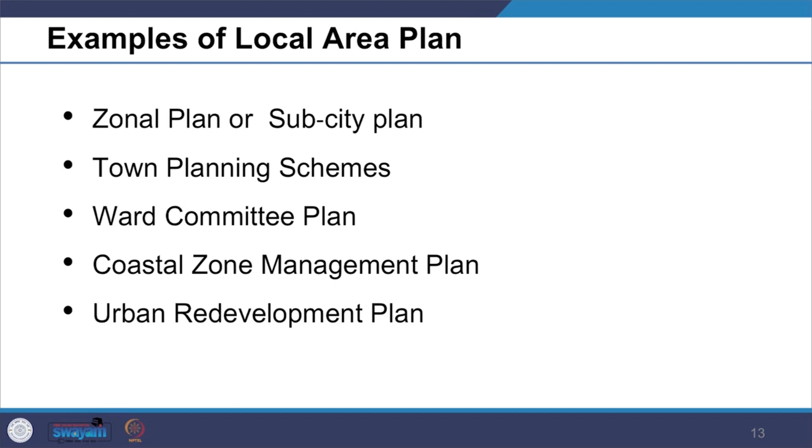Examples of local area plan include zonal plan or sub-city plan, town planning schemes, ward committee plan, coastal zone management plan, urban development plan, and urban redevelopment plan.

Once the development plan is prepared, its proposals can be further implemented by preparing a local area plan. Local area plan is significant in view of the 73rd and 74th Constitutional Amendment Act, as a local area plan, in its true sense, allows disaggregation of the planning decision and implementation process. Local area plan improves the implementation of the development plan, and most importantly, it brings the planning process closer to the local people. It allows the realization of the development in our neighborhoods.

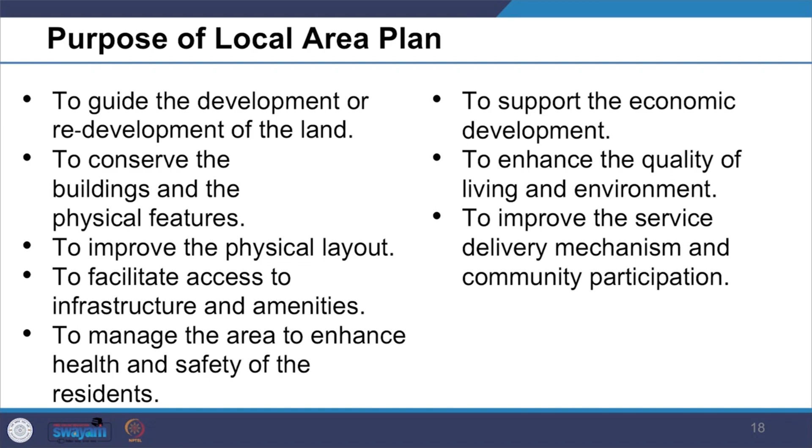Local area plans are primarily prepared to guide the development or redevelopment of the land, to conserve the buildings and physical features, to improve the physical layout, to facilitate access to infrastructure and amenities, to manage the area to enhance health and safety of the residents, to support economic development, and to enhance the quality of living and the environment. Local area plan is used for improving the service delivery mechanism and community participation.

While preparing the local area plan, it is also important that implementation details are specified and aligned with government policies, such as the state land use policy, state perspective plan and/or state urbanization policy, state urban housing or affordable housing policy, township and integrated township policy, rainwater harvesting policy, energy policy, disaster management policy, industrial and service sector investment policy, policy for a barrier-free environment for the elderly and physically disabled, e-governance and information technology policy, tourism policy, and similar other policies.

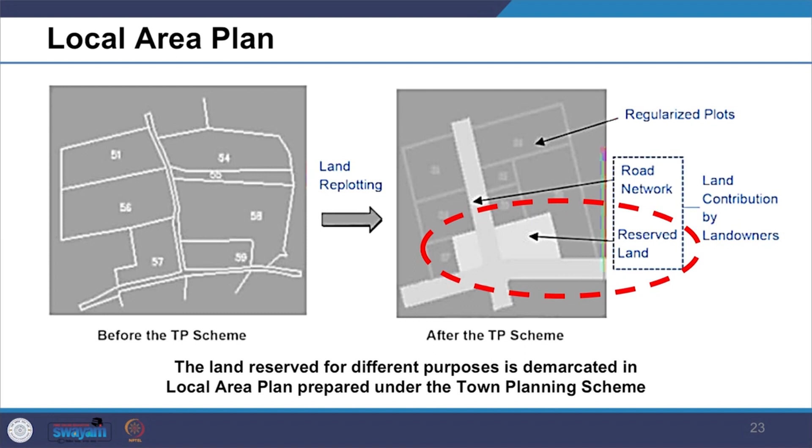In the local area plan, specific projects within the planning area should be prepared. The land reserved for different purposes such as roads, public purpose, construction, or reclamation should be delineated.

The local area plan provides a framework for recovery of the associated cost for the proposed public projects. The mechanism adopted could be levy of betterment charges, charges on additional development rights, or user charges.

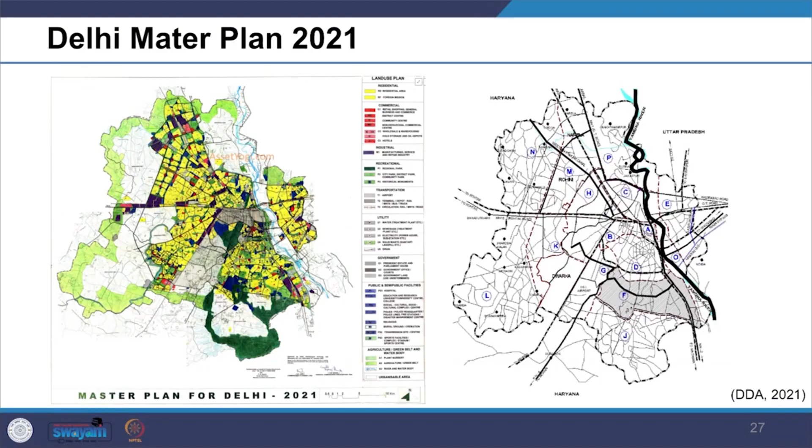Now let us look at the example of Delhi. We are looking at the Master Plan of Delhi 2021, where planners had prepared the master plan for the entire city. In order to prepare the detailed sub-city land use plan, the Delhi planning area is further subdivided into 15 planning zones, or divisions, designated alphabets A to P, excluding I, as per the Master Plan of 2021, as we can see in the image.

These zonal plans integrate the area with the urban infrastructure, mobility and services. These zonal plans help in implementing the development plan of Delhi by guiding the detailed development in these zones.

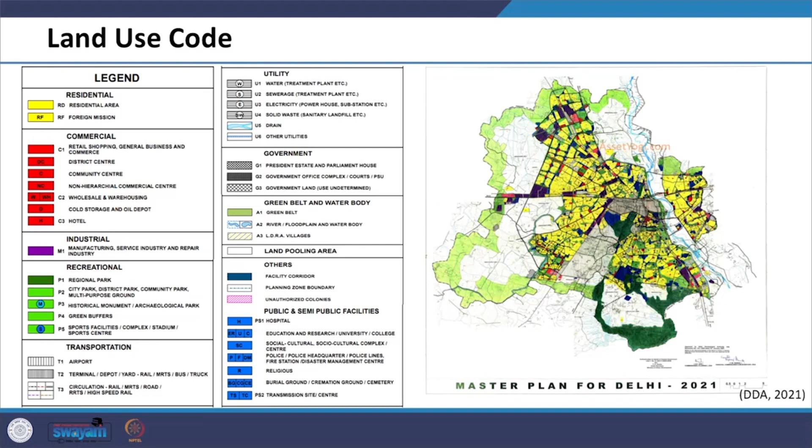A zonal development plan means a plan for each zone or division, containing information such as provision of social infrastructure, parks and open spaces, and circulation system. The zonal development plan indicates the actual as well as proposed use zones designated in the nine land use categories stated in the master plan, according to which the area in the zone is to be finally developed.

We will look in detail at the zonal plan F of Delhi to understand the intent and content of a zonal plan document. Zonal plan F covers the South Delhi 1 area.

The hierarchy of urban development indicated in the zonal development plan is in conformity with the master plan 2021.

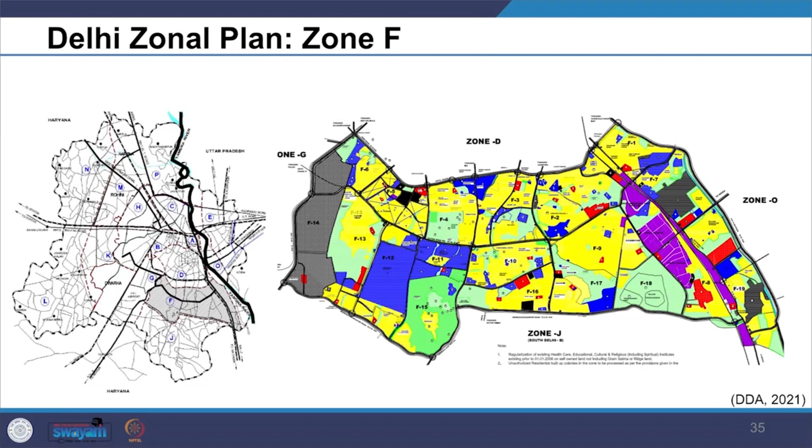Zone F, covering an area of nearly 11,958 hectares, is situated towards the south of Ring Road from Dhaula Kuan to Maharani Bagh. In the east, it is bounded by River Yamuna and National Highway 2 bypass. In the west, it is bounded by Delhi Cantonment Area, Indira Gandhi International Airport, and National Highway 8. In the south, it is bounded by Badarpur, Mehrauli, Mahipalpur Road.

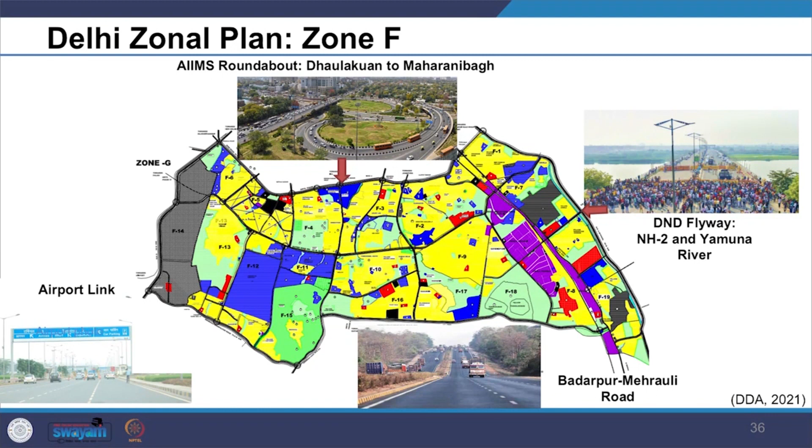The zonal plan should contain an introduction section which should provide a brief about the city, indicating its regional setting, functional character, and growth trends.

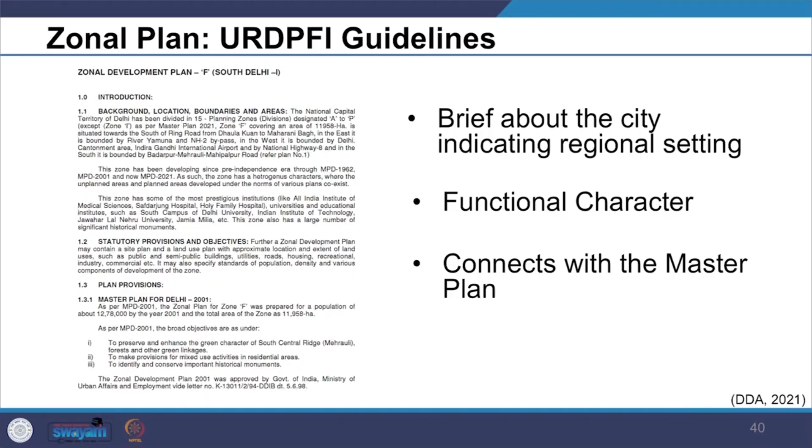Further, the introduction section should also refer and connect to the development plan or the master plan of the city, for which it acts as a building block. We call it a building block because the local area plan plays an important role in the realization of the development plan or master plan of any city.

In the plan, we also inform about the built up area, character, extent, and the delineation boundaries, so as to understand the area and plan for the interventions.

In this introductory section, the interdependence of the planned zone with the other zones should be specified so that in the plan we understand the vital role of the zone in facilitating the development of the area under consideration, as well as its key role in contributing to the smooth functioning of the entire city, particularly mobility and services.

If we look into the zone, this zone has been developing since the pre-independence era through master plans of 1962, 2001, and 2021. As such, the zone has heterogeneous character, where the unplanned areas and the planned areas developed under the norms of various plans coexist.

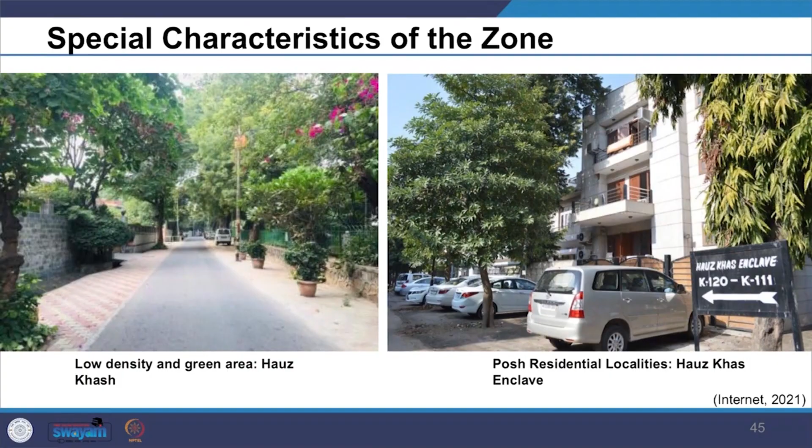Zone F is identifiable with low density and green character. This zone is mainly comprised of planned, well-maintained, posh residential localities. This also includes rehabilitation colonies and government housing areas.

This zone has some of the most prestigious institutions like All India Institute of Medical Science, Safdarjung Hospital, Holy Family Hospital, universities and educational institutions such as South Campus of Delhi University, Indian Institute of Technology, Jawaharlal Nehru University, and Jamia Millia University.

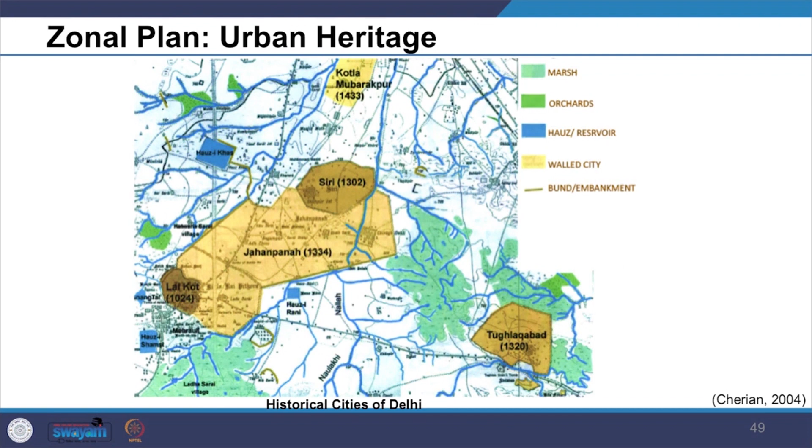A significant feature of this zone is its urban heritage, where the first four cities of Delhi, namely Lalkot, Siri, Tughlaqabad, and Jahanpanah, are located.

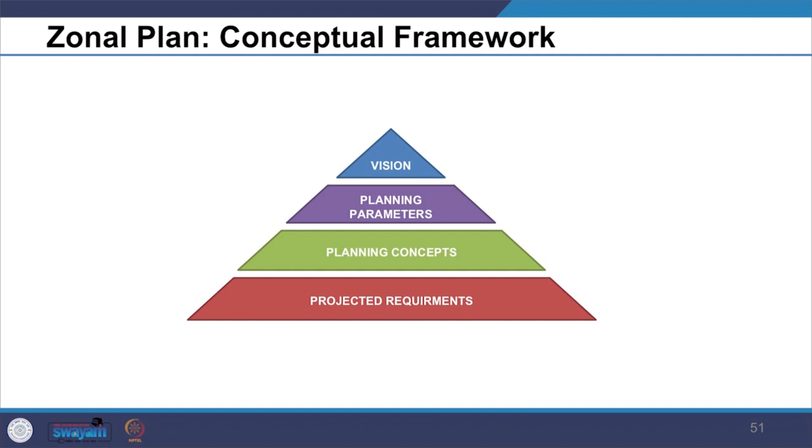The next content suggested in the guidelines includes the site background and analysis, followed by conceptual framework covering future vision, planning parameters, planning concepts, urban design framework, and projected requirements and hierarchy targeted in the zone.

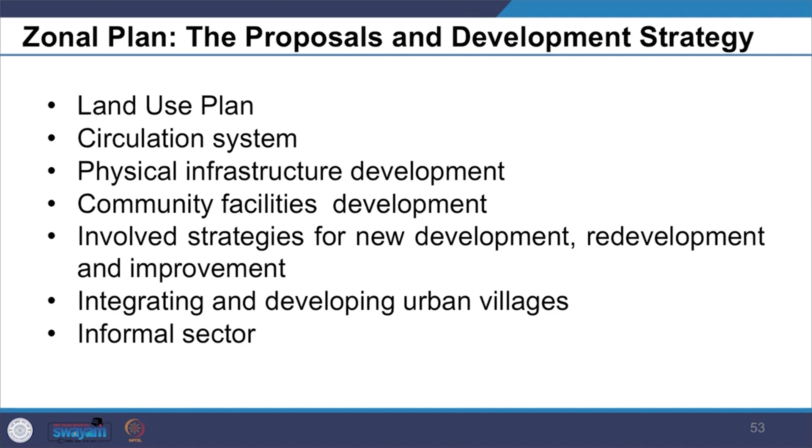Thereafter, in the zonal plan, the proposal and development strategy should be provided with details, including the land use plan, proposed circulation system, proposals for physical infrastructure development, and proposals for community facilities development, along with strategies for new development, redevelopment, and improvement. All these plans have to be given.

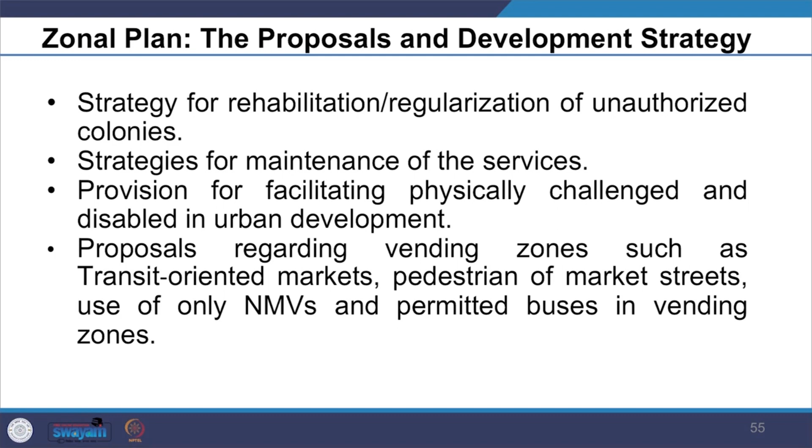A proposal for integrating and developing urban villages has to be provided, as well as a proposal for informal sector development. The details should also cover the strategy for rehabilitation and regularization of unauthorized colonies, strategies for maintenance of services, and provision for facilitating physically challenged and disabled persons in urban development.

Proposals regarding vending zones, such as transit oriented markets, pedestrianization of market streets, use of only non-motorized vehicles and permitted buses in vending zones—such kinds of interventions can also be taken up in the zonal plan.

Further, in order to address the concerns of the environment, the guidelines suggest the following should be covered. A plan for conservation and improvement of land profile, rivers, streams, watersheds, green covers, and landscape should be prepared as per the requirements of the zone. Identification of the heritage areas and zones, and a plan for their conservation, should be provided.

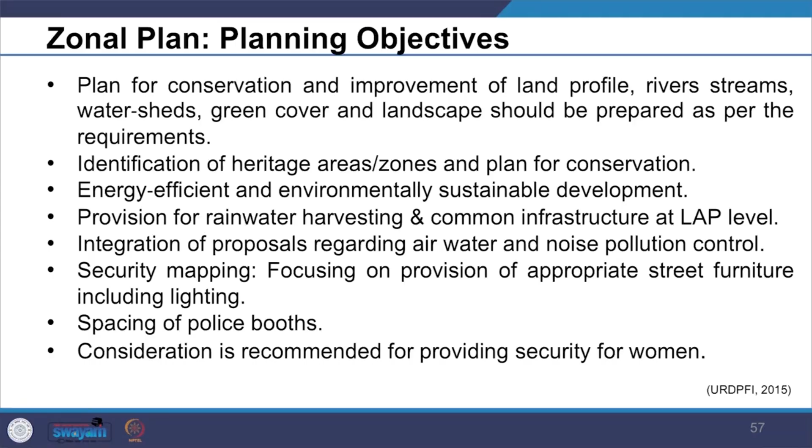Energy efficient and environmentally sustainable development has to be taken care of. Provision for rainwater harvesting and common infrastructure at local area plan level has to be considered. Integration of proposals regarding air, water and noise pollution control has to be done. Security mapping focusing on provision of appropriate street furniture including lighting needs to be undertaken, and spacing of police booths has to be done. Also, consideration is recommended by the guidelines for providing security for women. So all these things have to be taken care of as environmental concerns while working on the zonal plan.

Furthermore, zoning regulations have to be seen, such as defining various zones, what use restrictions would be there, uses permitted, conditionally permitted and uses which are prohibited has to be spelled out. What has been proposed for mixed use land uses has to be indicated. Strategy for non-conforming land use has to be mentioned, and strategies for hazard zones and regulations have to be clarified.

Proposal for meeting women's needs, further mixed use development with focus on street activities, is also recommended specifically for women's needs. Transit oriented development and space provision for street vendors have to be encouraged in areas to be active at various times of the day and night.

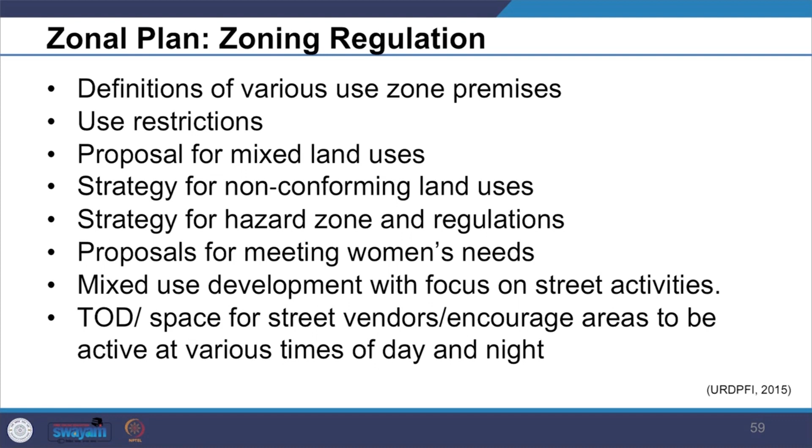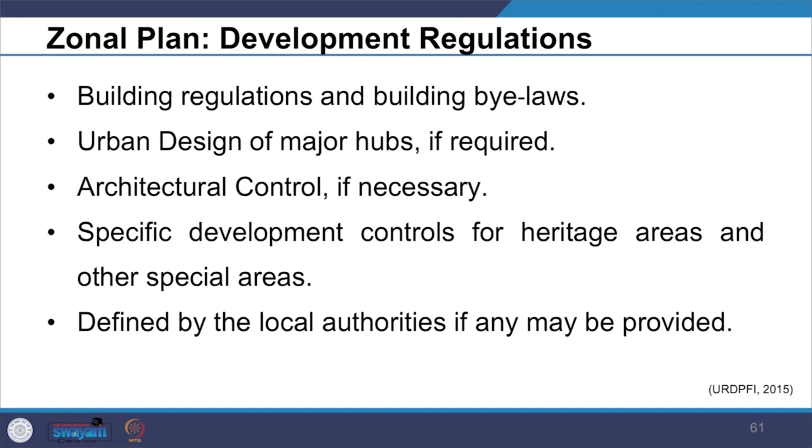We further see that the zonal plan also needs to address development regulations. Building regulations and building bylaws have to be indicated. Urban design of major hubs, if required, has to be indicated in the plan. Architectural control likewise has to be indicated. Specific development controls of heritage areas and other specific or traditional areas as defined by local authorities, if any, may be provided in the local plan.

Further, in the zonal plan, resource mobilization and implementation plan has to be given. While giving this, institutional setup for implementation needs to be addressed. Physical infrastructure development cost, including annual and 5-year phasing, has to be specified. Resource mobilization for implementation through public, private and other sectors have to be indicated. Further, it needs to give an implementation framework, where one gives how the plan will be phased, what all projects and policies will be prioritized for development, and how the entire development would be managed.

Further, the local area plan provides a suggestive list of maps: detailed scale maps of the prevailing situations, detailed scale maps of the existing land use, detailed scale maps of proposed land use, and scaled maps of proposed locations of infrastructure and social services, which is to be addressed in the zonal plan.

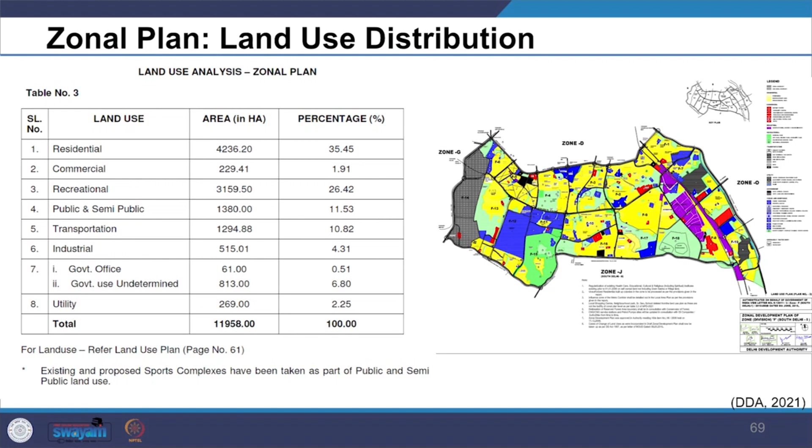Looking at zonal plan F, in the background of the zonal plan, land use distribution and analysis is included, so that we know how land is put into use, its proportion and level of quality of life for people living in the zone. So here we see how the land is distributed, and we look at the plan prepared for that particular zone, zone F. This land use plan of zone F is made at 1:20,000 scale.

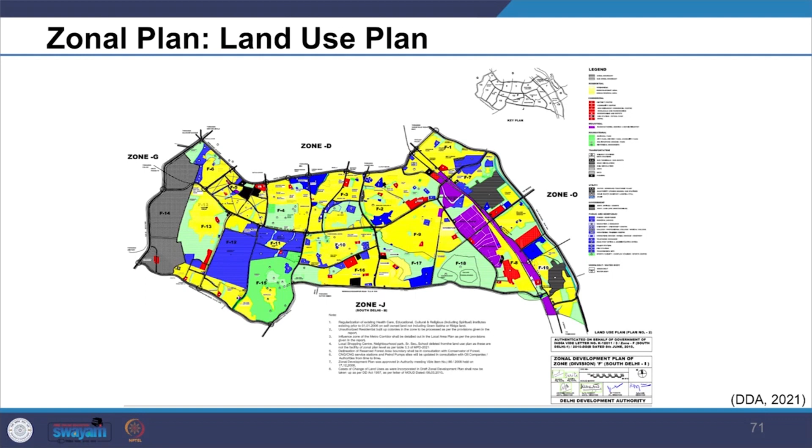Further, while providing the population and density projections, the plan provides information about the existing population, the holding capacity, and the projected population. Master Plan of Delhi 2021 has stipulated the population holding capacity of this zone to be about 19,75,000, and the total area of the zone to be 11,958 hectares.

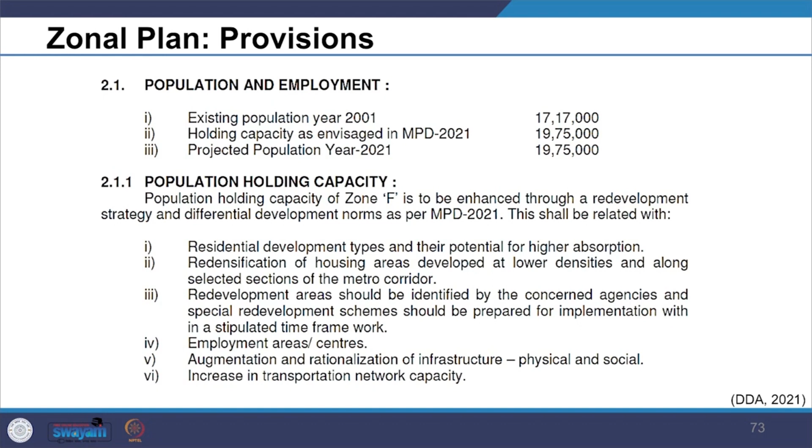As per Master Plan 2021, a number of planning measures such as local area planning, redevelopment of villages, unauthorized colonies and built up areas, restructuring and upgradation of residential areas in the influence zone of the MRTS and major transport corridors, and a network of recreational and sports facilities, are to be suitably incorporated while preparing the detailed scheme.

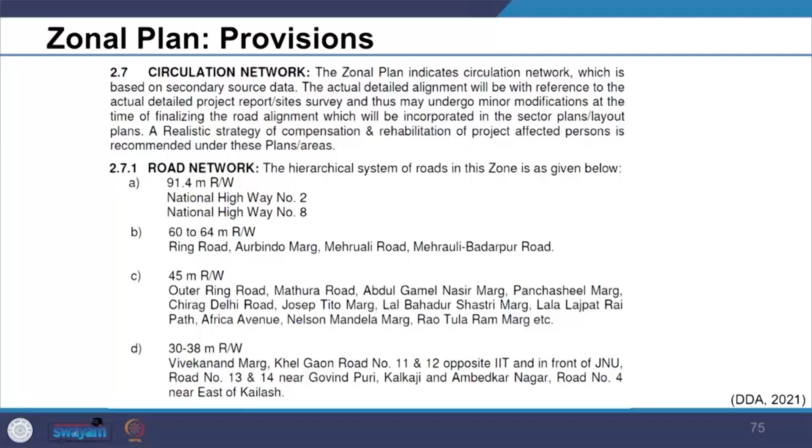In the zonal plan, information on transportation such as circulation network, traffic flow of people and goods, and terminal facilities are provided, which are important to address the needs of the area as well as the entire city. So the zonal plan provides all this information. In this snapshot you can see it talks about the circulation network, what all circulation networks are there, what road networks are there. It gives all the details and identifies all the road stretches.

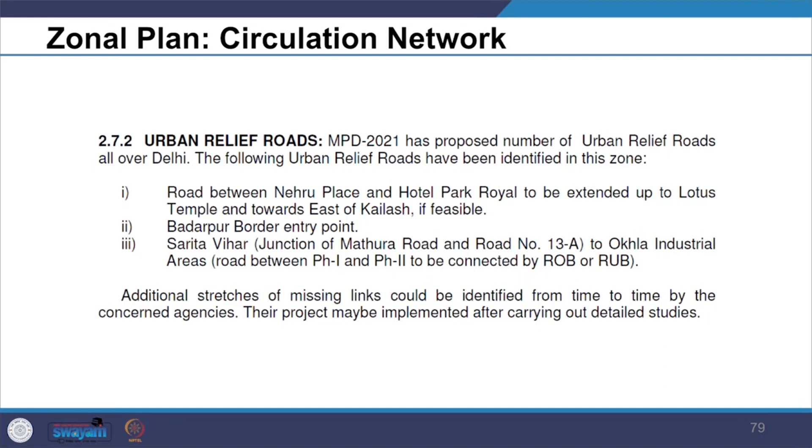It also identifies the urban relief roads and also indicates and lists all the mass transit systems in this area.

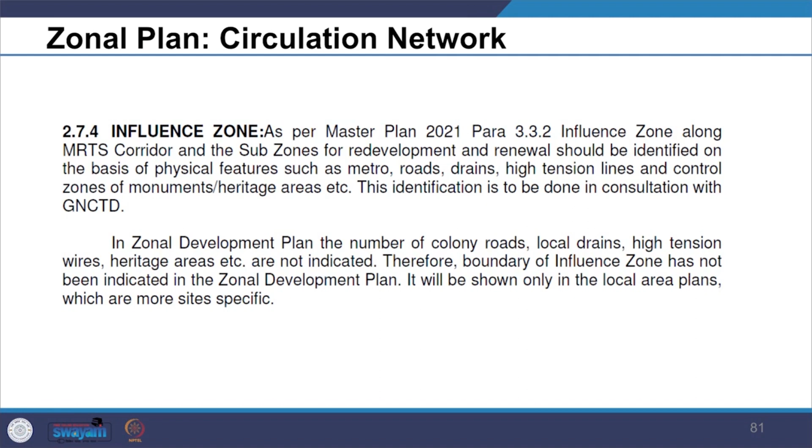We also see an indication of the influence zone and how the details of each influence zone have to be worked out. In the zonal development plan, the number of colony roads, local drains, high tension wires, heritage areas, etc. are not indicated. Therefore, in this plan, they have indicated the limitation of why the details of the influence zone could not be made.

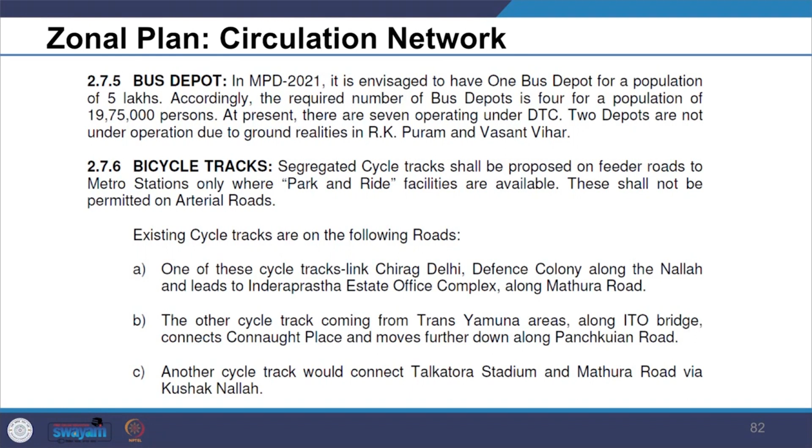Likewise, it gives information on the bus depot, bicycle tracks proposed, and the railway stations. Further, within this circulation, they also provide information on parking and the range of parkings which we see.

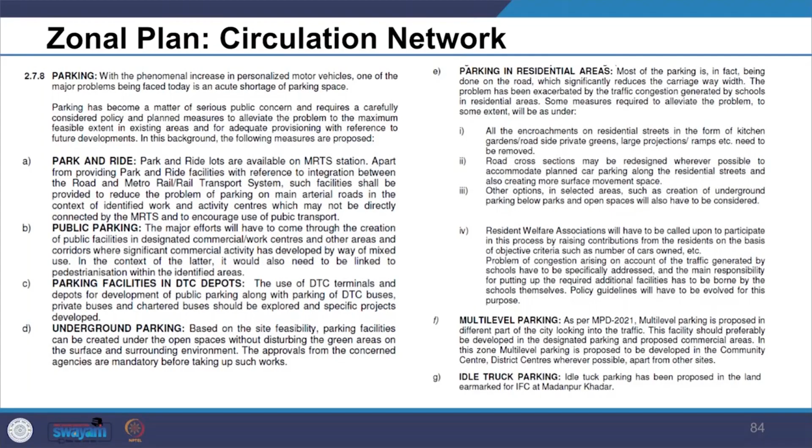The zonal plan further provides information on the physical and social infrastructure along with assessment of current gap and future need of the population.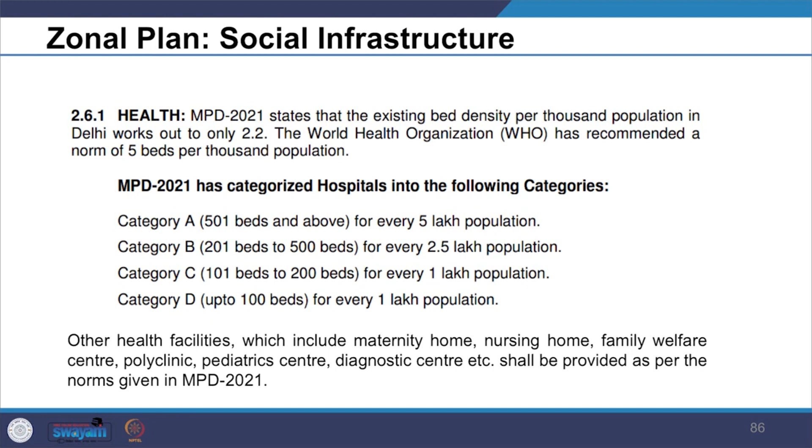So here we see it addresses the health concern. It is showing what guidelines are being referred to as per Delhi guidelines applied, as well as compared with the World Health Organization's recommended standards. That has been addressed here, and based on that, what kind of interventions are needed have been projected.

Further, in order to address the gap, rebuilding, upgradation and modernization of the existing old hospitals is proposed by enhancement of FAR for various levels of health infrastructure, in order to meet the projected target.

We see this location has IIT Delhi, JNU, medical colleges, vocational training centers, sports facilities, and communication and post telephone facilities. So all these are located here. These have been identified, marked, and further interventions have been indicated. We can see the list here, all the facility centers have been marked, and what kind of proposals have been given have been listed in the zonal plan.

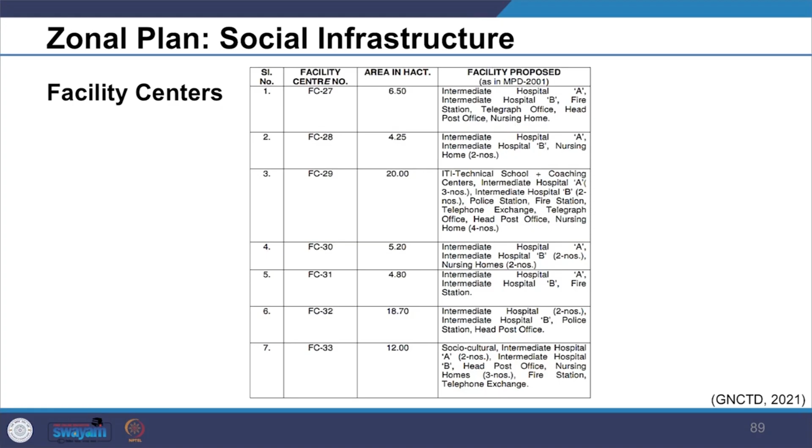Areas of environmental significance have been identified, along with all the recreational areas. We see that this zone is unique in terms of large green area and open space.

The south central Mehrauli Ridge, which is a conservation area, falls in the hierarchy of regional parks. Besides large district parks, it has two city forests, Hauz Khas and Jahanpanah. There are various sports complexes like Siri Fort, Saket, Jasola, and also lawn tennis stadia.

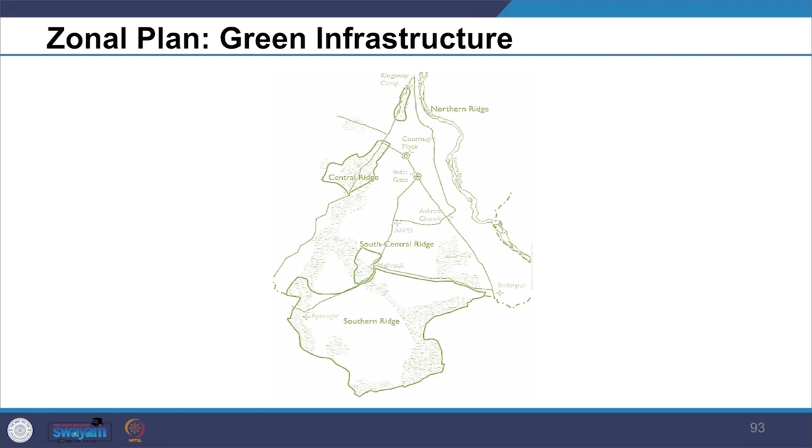We look at all these parks at the south central ridge area located in this zone and what kind of planning interventions are needed to protect them and enhance their quality. We can also see the district park of Hauz Khas, the district park of Dhaula Kuan, and Satpula Lake here.

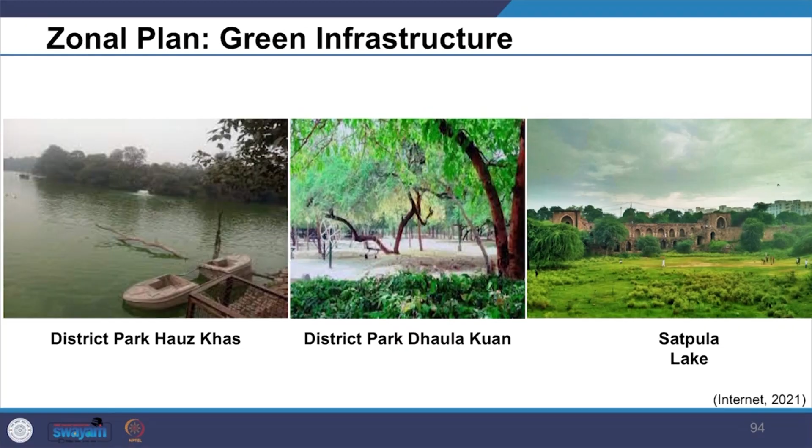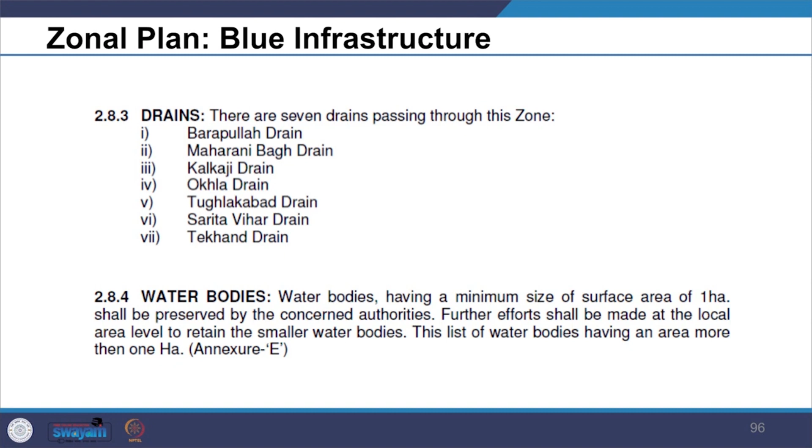In the plan, we see the slope analysis and drainage information as well, which are necessary for decision making. The snapshot of the zonal plan shows how they have indicated and listed all the drainage and water bodies located in the zone. We can see here the Barapullah drain, and I have got the image just to understand the location, and the Maharani Bagh drain, so we can see the situation in the zone.

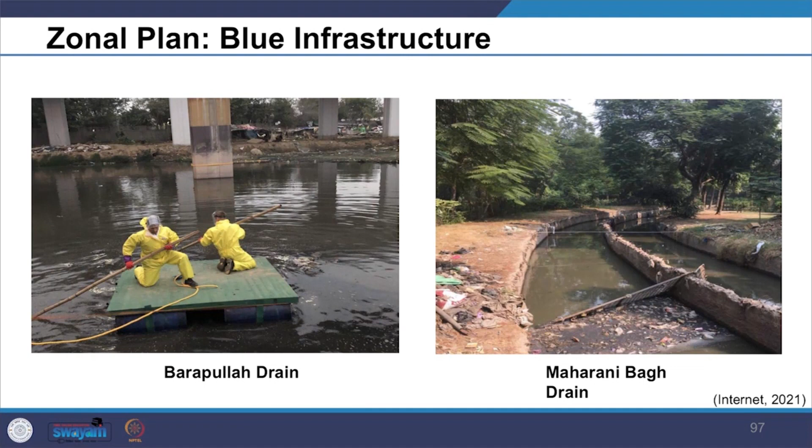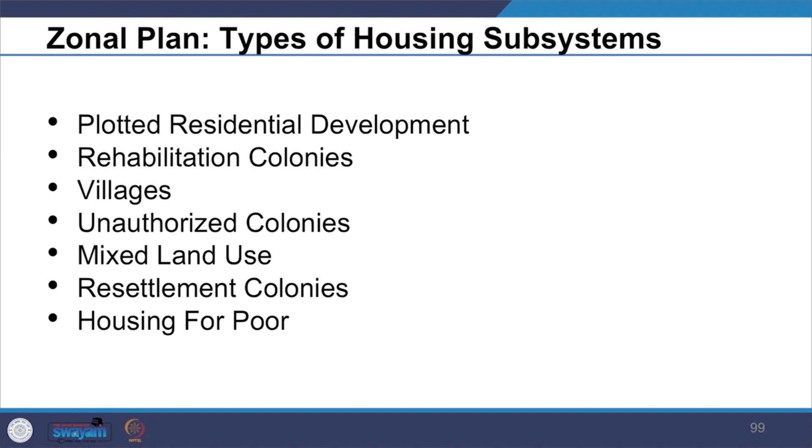Further in the zonal plan, we see that information on housing stock and typologies such as low cost housing and affordable housing are provided in detail for addressing the housing concern at the zonal and city level. The types of housing subsystems include plotted residential development, rehabilitation colonies, villages, unauthorized colonies, mixed land use, resettlement colonies, and housing for the poor.

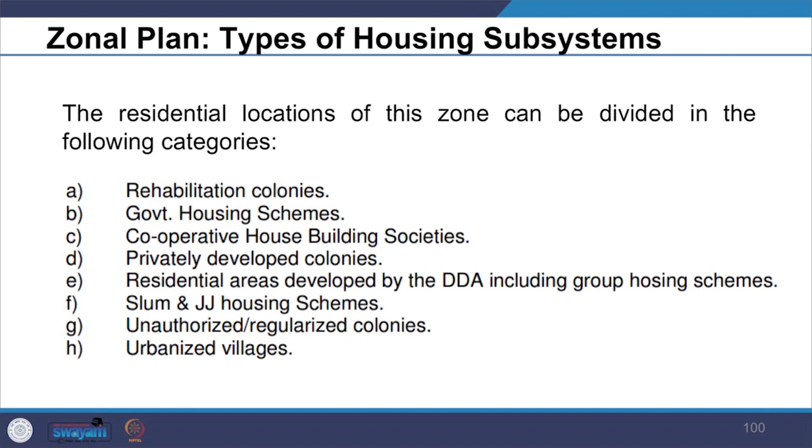The residential locations identified in this zone have been subdivided into categories in the zonal plan, including rehabilitation colonies, government housing schemes, cooperative house building societies, privately developed colonies, residential areas developed by DDA including group housing schemes, slum and jhuggi jhopdi housing schemes, unauthorized regularized colonies, and urbanized villages. All these criteria have been identified and noted in the zonal plan. We see glimpses of this plotted residential development.

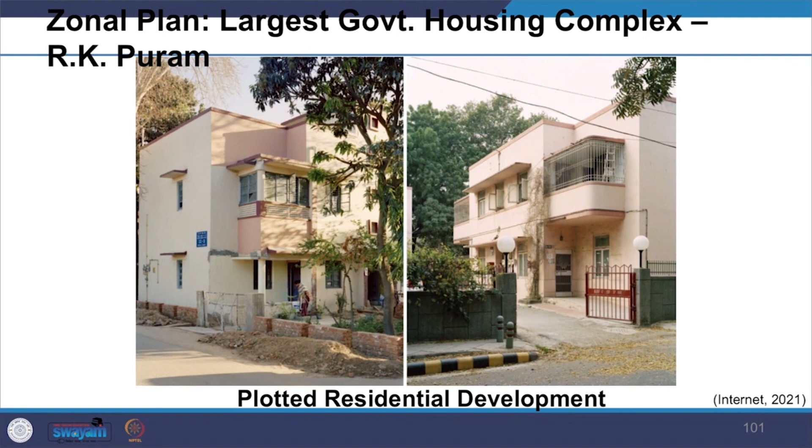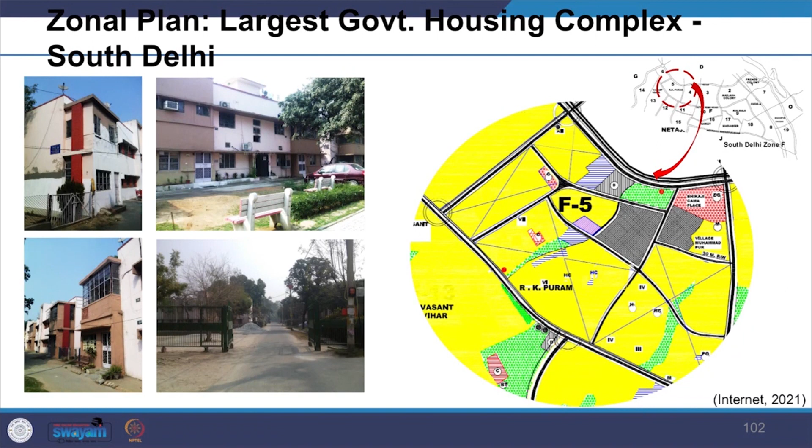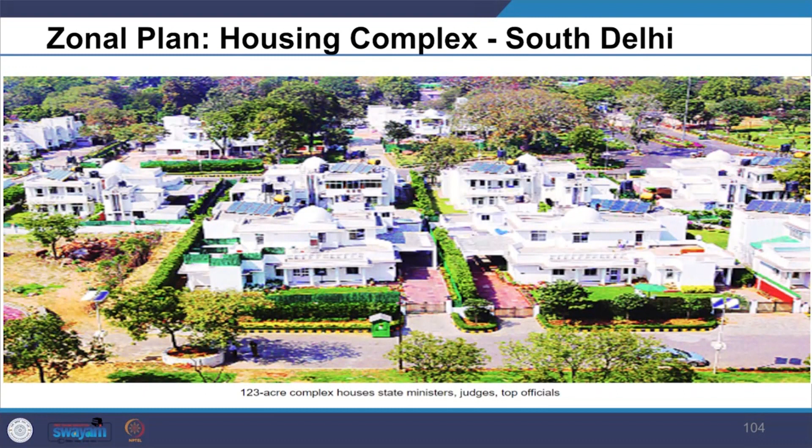This is one of the largest government housing complexes at RK Puram. We see another largest government housing complex at South Delhi. Another project we see at Moti Bagh, New Delhi, so you may get an idea about the region we are talking about. And this is the judges' and top officials' housing complex.

Further, we see that there are several large rehabilitation colonies developed by the Ministry of Rehabilitation to provide accommodation for displaced persons after the independence of the country. These include Lajpat Nagar, Kalkaji, Amar Colony, Malviya Nagar, and so on.

Further, the zonal plan also identifies 36 villages in zone F, for which a comprehensive list has been provided. The socio-economic changes in these villages have been substantial. The redevelopment plan needs to ensure that the permissibility of mixed use zoning at the property or premise level is compatible with the predominant residential areas. In the zonal plan, the need for a village redevelopment scheme has been highlighted for the development and upgradation of villages. The village abadi are treated as a special area, where special area regulations of Master Plan 2021 are applicable.

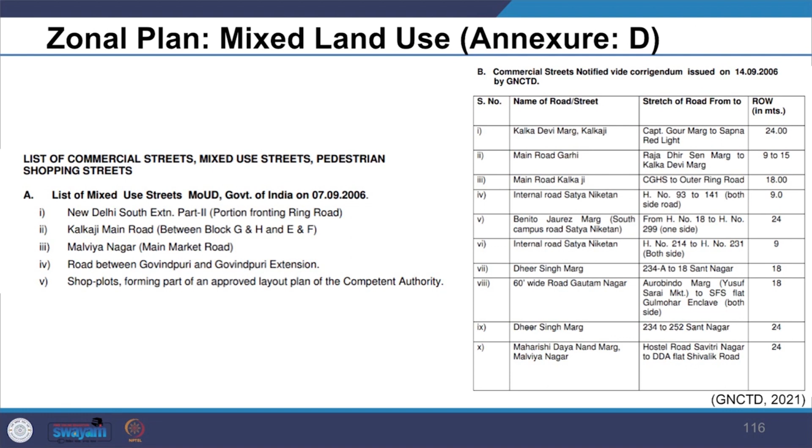Next, we can see the category of resettlement colonies. There are a number of resettlement colonies in this zone. Most have been provided with essential services, but the immediate need is for individual services, that is water, sewerage and electricity. The zonal plan states that construction of houses should align with approved standard and building plans to ensure a healthy and better environment. Provision has been made for cooperative societies, private developers, and government agencies to come forward for redevelopment based on incentives applicable for the squatter rehabilitation scheme.

Likewise, we also see another typology addressing housing for the poor. In the zonal plan, all the resettlement plots are identified.

As per the records, the zone has more than 40,000 resettlement plots and 31,000 EWS Janta dwelling units. Likewise, for slum rehabilitation, in the zonal plan all the locations have been identified. We see 96 slum clusters in the zone.

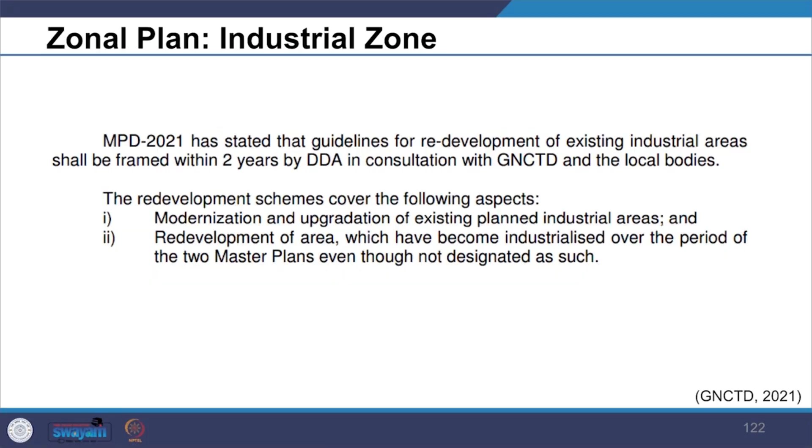Further, the industrial segment is also addressed. In the zonal plan, current industrial guidelines are reviewed, which talk about guidelines for redevelopment of existing industries, to be framed within 2 years by DDA in consultation with GNCTD and the local bodies. Overall strategies for the redevelopment scheme cover modernization and upgradation of existing planned industrial areas, and redevelopment of areas which have become industrialized over the period of 2 master plans, even though not designated as such.

In this particular zone, we have Okhla industrial area phase 1, 2 and 3. We also see Mohan Cooperative Industrial Area, and SI Complex, Okhla near Modi Flour Mill. So we see these 3 industrial areas in this zone.

These industrialized areas were developed in the 70s and over the years have deteriorated considerably in terms of physical infrastructure, and in some cases deficiencies on this score have persisted in an overall sense. Besides, there have been changes in the nature of activities in some areas, and there have also been demands for using part of the plots for activities which could be classified as commercial. Therefore, in the zonal plan, the need for modernization and upgradation of existing industrial areas with due regard to environmental considerations has been emphasized.

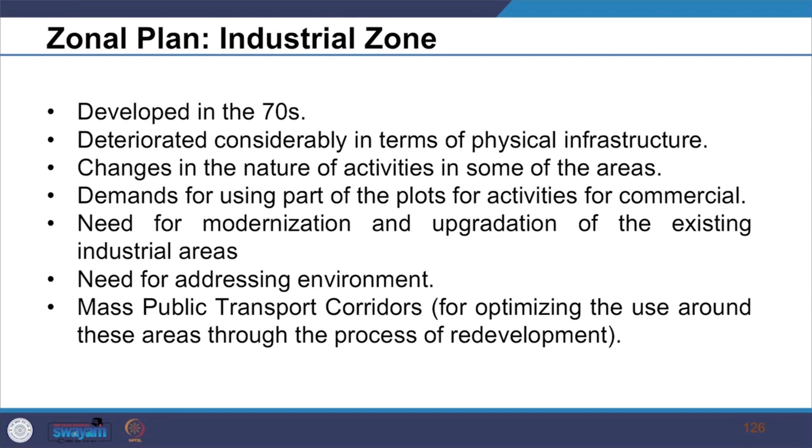Also, as most of the industrial areas are located along the mass public transport corridors, the need for optimizing the use around these areas through the process of redevelopment has been proposed.

We further see urban design guidelines which have been addressed in this zonal plan. We see provision for district centers made in this plan, which will be accessible through major transport modes and surrounding residential areas through pedestrian approaches, and these district centers have to be integrated with public spaces.

We also see provision given for other areas for urban design interventions. All the historical and monumental places have to be taken under urban design aspect. And areas along the entry routes and other important routes in Delhi, like Badarpur border, they all need to be addressed through urban design intervention.

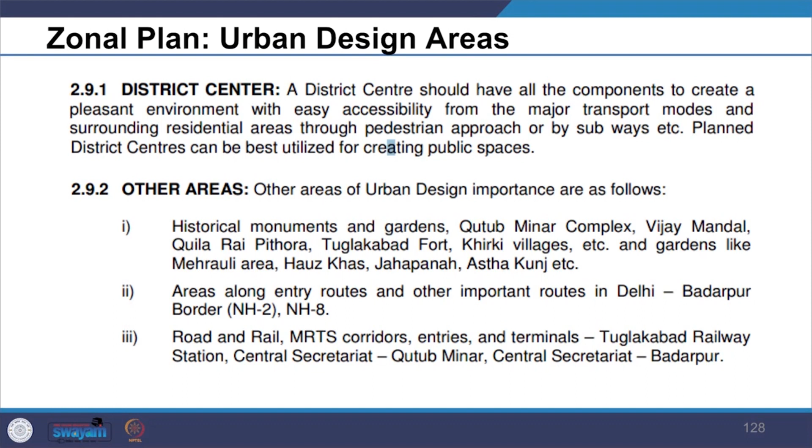Likewise, all the MRTS corridors, entries and terminals like Tughlakabad railway station, Central Secretariat, Qutub Minar, and Badarpur have to be considered under urban design intervention.

Similarly, there are proposals for conservation of built heritage. Also, heritage zones have been identified, and archaeological parks have been identified in the zone for further interventions.

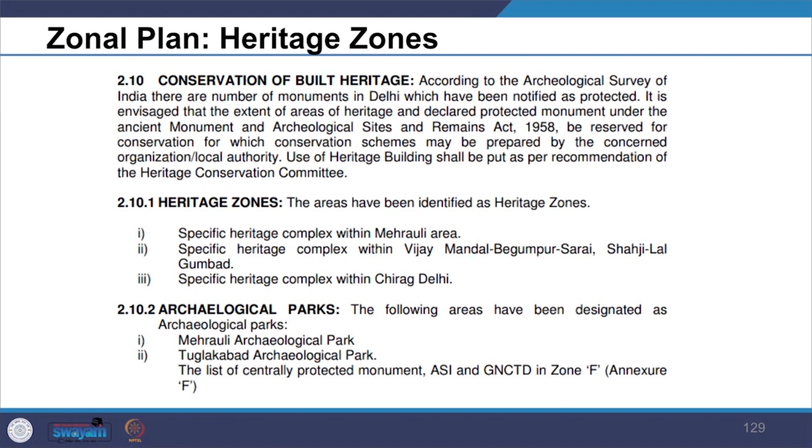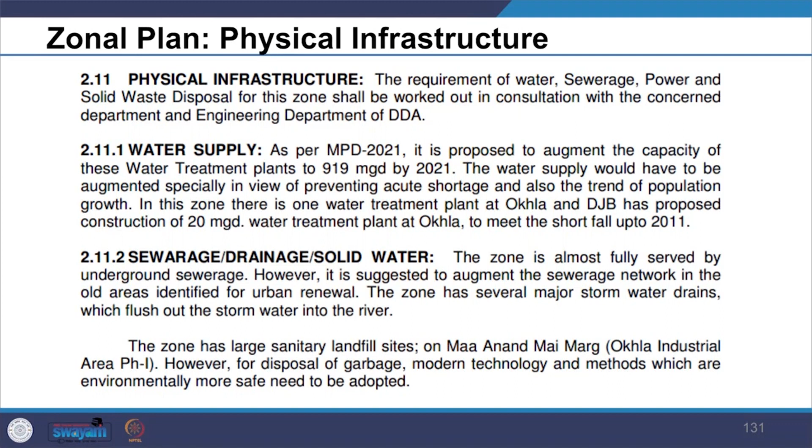Similarly, we see the zonal plan identifies the physical infrastructure, which majorly concerns water supply, sewerage, drainage and solid waste. So all these interventions, how they have to be taken care of, are addressed in the plan. Also, in the physical infrastructure intervention, power and other things have been identified, and the land use plan has been indicated.

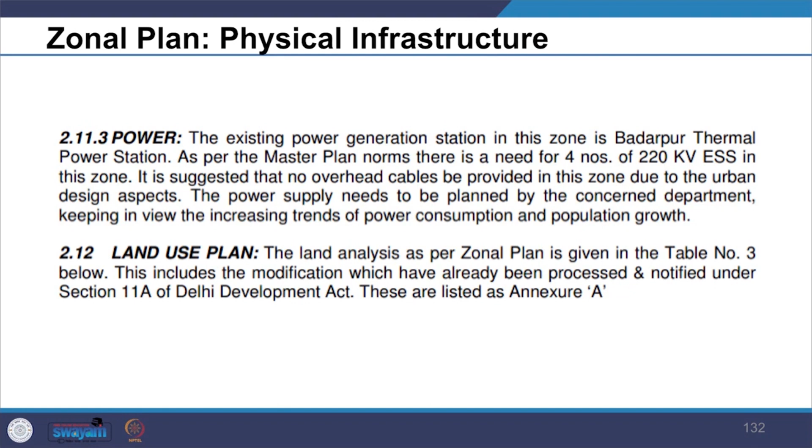So by reviewing the zonal plan of Zone F of Delhi, we have seen how Zone F was detailed out. All the aspects were clearly stated in the plan, and they were interconnected through circulation and other infrastructure with the other parts of the city. So we have seen what all it contains, what details the document contains, and how they are interconnected.

So we have looked into the intent of the local area plan, why it is made. Then we have also seen different kinds of local area plans, and we have reviewed the zonal plan, one of the zonal plans of Delhi, to understand the intent and content of local area plans.